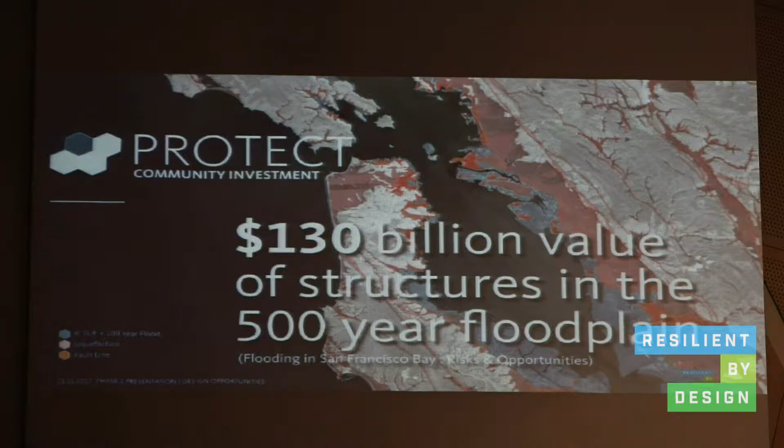So what does it really mean to design a lasting future for the Bay Area? We already know there's $130 billion of value of structures in the floodplain - how do we protect for that? There's 30% growth happening between 2010 and 2040 in the Bay Area, so how do we think about the growth aspect?

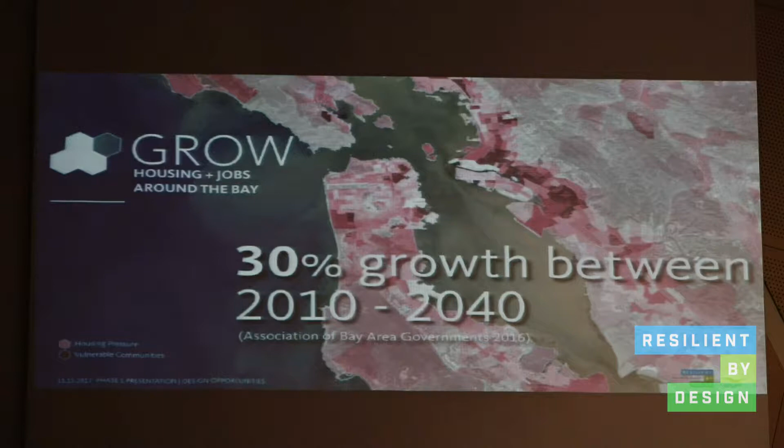When we think about trans-Bay corridors, studies suggest there's 152% capacity needed by 2040, so how do we think about moving goods and people? And there's really only 20% of the Bay shoreline that's accessible, so how do we engage that? Each of these systems doesn't run independently, and when we think about resilience, we want to make sure we think about all these four things together.

Given the complexity and the gravity of this challenge, our team approached the research phase eager to listen and to learn from the regional experts, the resilience experts, and the community leaders to find out what they had to teach us about resilience.

Looking back at the last 10 weeks or so of our process, it wasn't surprising to realize that our most vital insights came from walking through neighborhoods and talking with community leaders, really being led by those who have dedicated their lives and their careers to protecting communities in the Bay Area.

Besides our external outreach effort, our team also leaned heavily on our subject matter experts to conduct qualitative and quantitative research, and to synthesize a wealth of information into our design workshops conducted internally as a team. Together, it was our external outreach and internal workshops that gave us the insights we built on for the design concepts that Ricky and Cecil will be talking about in a few minutes.

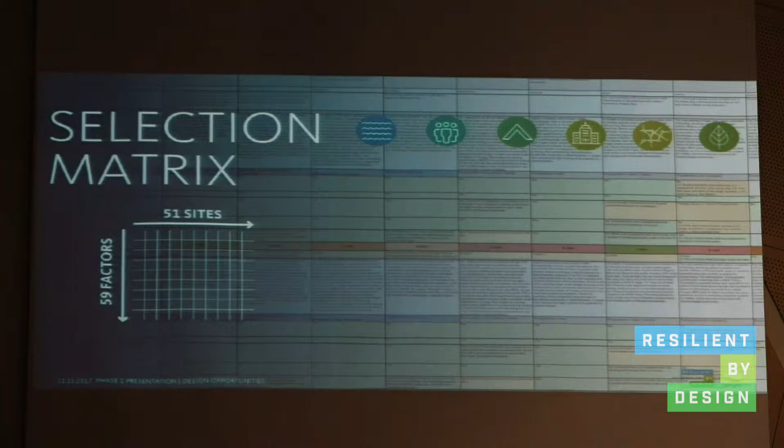With these 6 key stressor categories identified, and looking at these across our 4 strategic goals, our team developed a selection matrix that had over 50 factors and over 51 sites. This matrix provided a tool to allow us to evaluate sites in a more objective way.

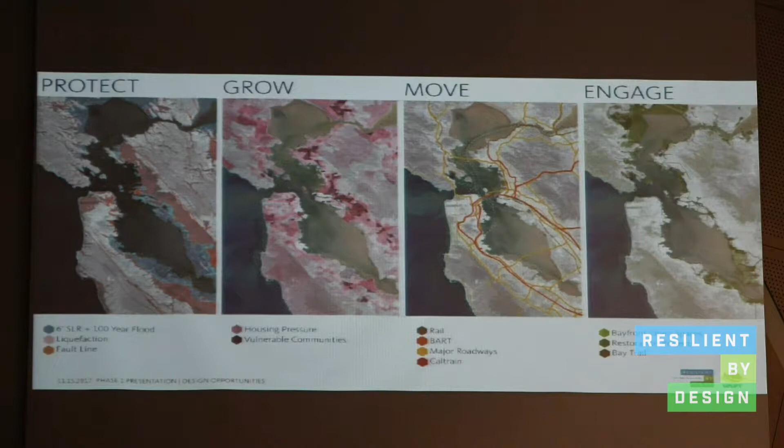Looking at all of the sites and all of the factors we took into account, from flooding to housing to mobility to ecology, we came back to 2 sites in particular, West Oakland and East Palo Alto, that really spoke to our team and presented the greatest opportunities for us to have high-level regional impacts from very localized interventions. From this research, we were able to tentatively identify our intervention area and begin designing the concepts that Ricky and Cecil will be walking through.

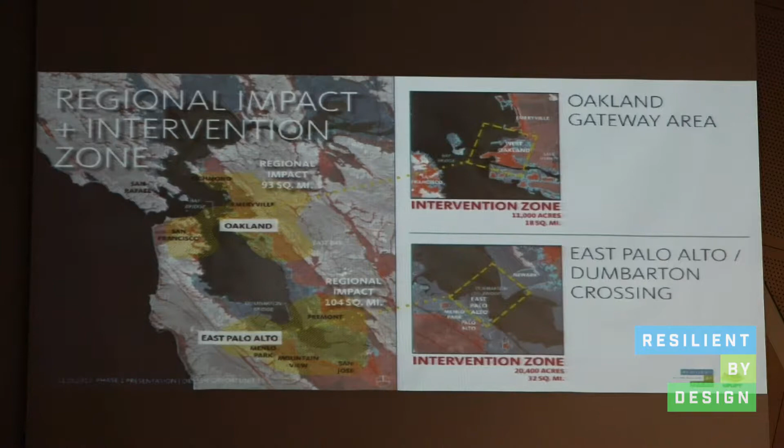So the first site we're going to be talking about is the Oakland Gateway area. What's really interesting about this area is it's very rich in many ways, and all this infrastructure—it's a real 3-dimensional equation and solution where there's so many different factors that come together. One of the most important things is that Oakland already has this vibrant character, its color, its richness. Making sure we understand what that is and work with that as a basic framework is really important.

But with that, how do we create new experiences on top of that? And how do we connect these experiences together? And how do we work with the community to really figure that out?

When we're balancing opportunities here, it's really about thinking about environmental justice, gentrification, and displacement in many cases. Can we actually build something adjacent to, for example, West Oakland, to increase opportunity but also create something that benefits the community adjacent to it as well? Is there a way to manage displacement with that? And is there a way of thinking about the risk of sea level rise and flooding in so many different ways and typologies?

In terms of the constraints, sea level rise—we need to figure out what we do. There's actually 2 vulnerabilities in that area. What do we do with the East Bay MUD and the wastewater treatment plant? And how do we think about some of the investments that are in the liquefaction zones?

We're thinking about growing the community because of growth. If we think about displacement, affordability of housing, gentrification—what do we do with that? Are there ways of preparing for this 30% rise in jobs and housing needs?

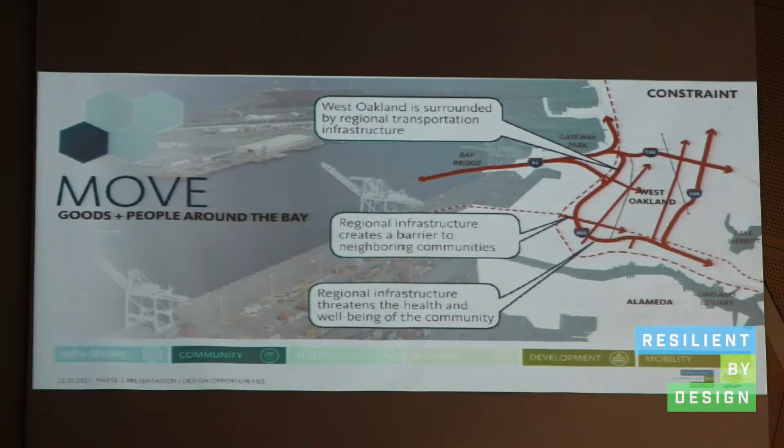In terms of moving, infrastructure is a huge thing. Infrastructure could connect, but in many cases it does divide. So how do you actually create infrastructure that begins to provide value for its adjacencies? And with mobility and infrastructure, are there ways of thinking about it from a health and wellness perspective?

If we want to engage, how do you actually get a community to connect back to the bay? We have an operating port, there's all this rail infrastructure, but how are the ways that we do that? And in many cases, here with Oakland and Alameda, the estuary divides up those communities. So how can we connect those things together?

So the first design opportunity and concept we talk about is bridging communities through uplift. The first thing we do is protect the edges, Gateway Park, and also down on the southern side where the estuary is. In terms of growing, there's opportunities of creating and utilizing the underutilized rail areas to be able to create a deck and a community above that.

There's also opportunities to ease some of that growth pressure as well. In terms of moving, can we actually rethink the I-880 corridor and see what we can do with that? Can we also reorganize some of the port logistics? Remember, all the pollution, the air pollution, all of those things are coming from there, but how do we actually mitigate some of that so there are advantages for the community?

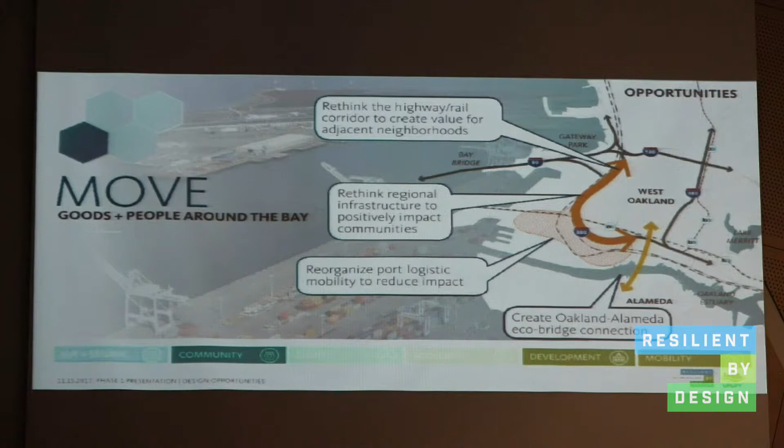And then is there a way to create this kind of eco-connection between Alameda and Oakland? In terms of engaging, if we create this new deck above the railway, is there a way of creating this new connection, bringing green and water closer to West Oakland, but also being able to get closer to the water from West Oakland as well? And then is there a way of creating that connection to Oakland? So the strategies here are a synthesis in terms of our concepts of what we're thinking of doing.

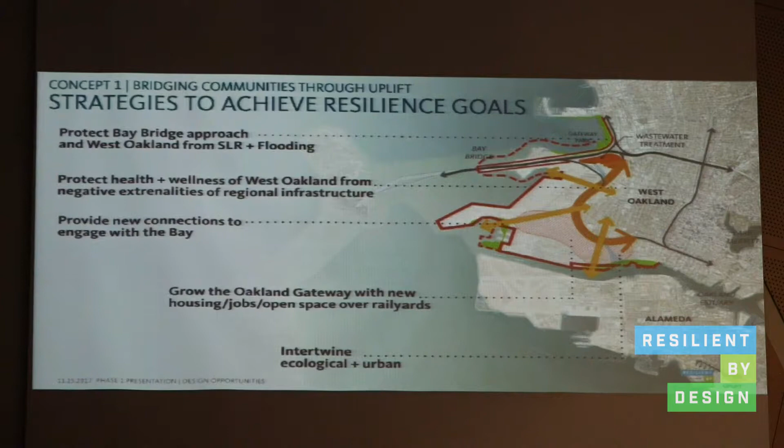It's really about thinking how do we intertwine the ecological and urban conditions, so it's not isolated, but how do we use that to our advantage. We do that in order to protect, grow, engage, and move people.

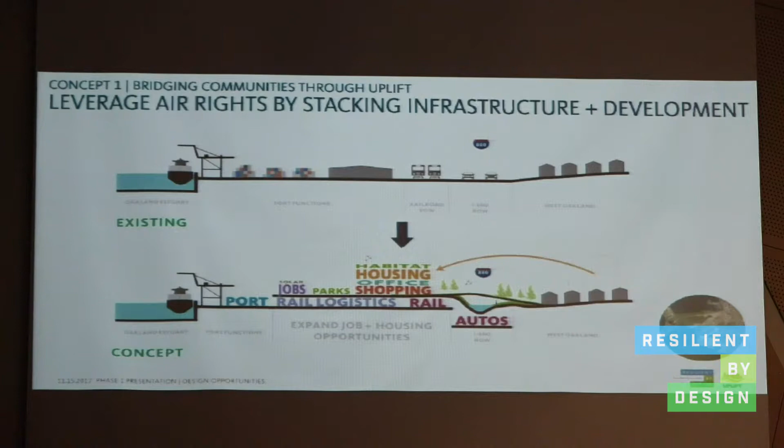So this is thinking about things three-dimensionally. You see the existing condition at the top, and a section at the bottom. The section shows how you can have a dialogue between West Oakland and this new community in terms of new opportunities for managed development. You can see the rail logistics below, and new opportunities for habitat, job growth, and new parks as well.

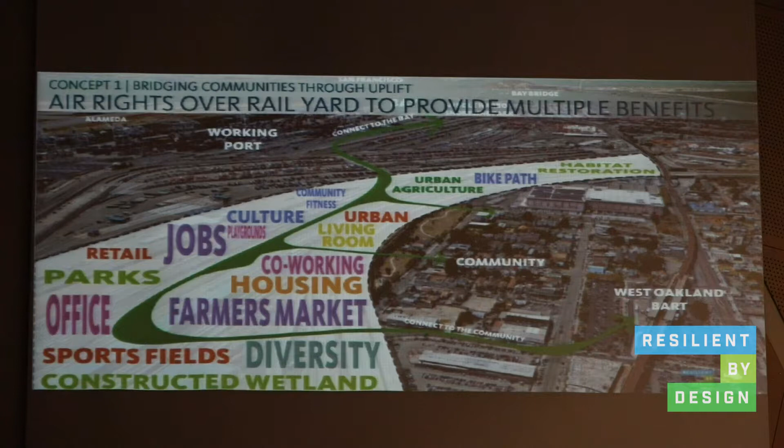We found the challenges and opportunities in this area so compelling and complex that we developed another concept for it, using some of the moves shown in our previous concept but shifting our focus towards bringing water in and using it to connect communities from Gateway Park to Alameda. Our concept reimagines the regional infrastructure, which has disproportionately negatively impacted West Oakland, in particular the wastewater treatment plant, which will become increasingly vulnerable with sea level rise, more severe rain events, and increasing populations.

While sea level rise protection will happen primarily along the shoreline with both hard and soft protective infrastructure, we saw an opportunity to use the 880 right-of-way to address current and impending issues by transforming the spaces under and adjacent to the highway with a green, spongy corridor. We can treat wastewater with wetlands, provide habitat and open space, provide a green buffer for highway air pollution, provide land that acts as a sponge during flooding events, and create a new and protected bay trail.

The corridor would link Gateway Park through West Oakland and down to Alameda, where we're proposing a new bridge to connect West Alameda to Oakland, providing a critical missing link. The right-of-way actually closely aligns with the historic shoreline, and by transforming this land, we're reconnecting two parts of the bay that were historically tied together.

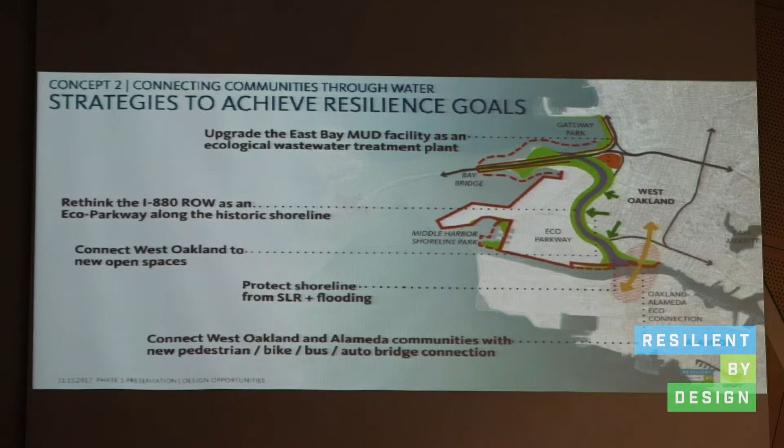In an area so cut off from the bay, we think it's critical to provide more ways and spaces of engaging with the bay, and to use water as cultural placemaking, understanding that resiliency is not just about flood protection but also about creating social cohesion. This likens to cities with canal networks—the canals were often built to control for flooding, but over time have become iconic elements of the city, and we see that creating a sense of place strengthens community.

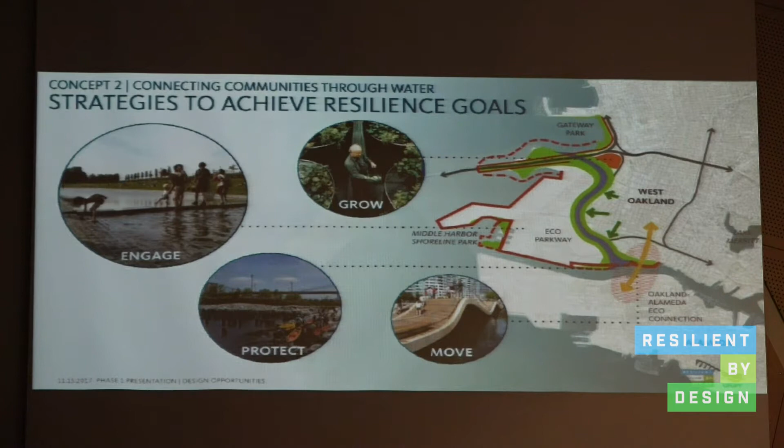At the southern end of our site, the Oakland estuary currently forms a barrier between Oakland and Alameda. By bridging the estuary, we can connect communities, activate both sides of the estuary, and provide more access to the water and an evacuation route during disasters. By reconfiguring the existing transportation arteries, including undergrounding the rail, we can create space for development, improve air quality, and reduce neighborhood traffic.

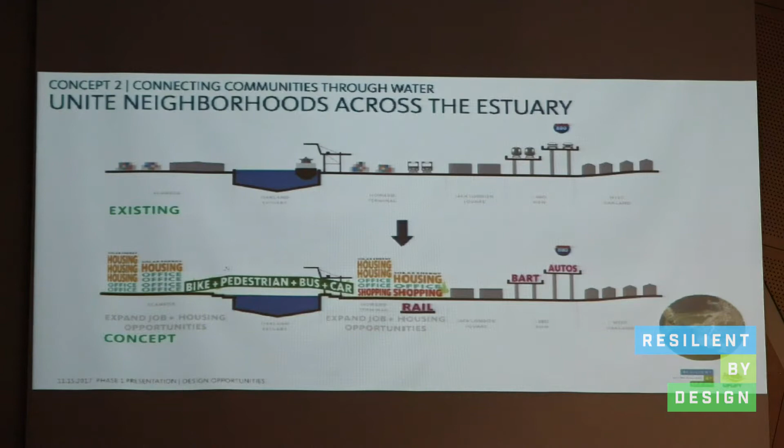Further north towards the Bay Bridge, the existing conditions show the breadth of land devoted to the rail and 880 corridor. Our concept transforms this land into a blue-green corridor, and while we likely won't be able to absorb all 63 million gallons of water currently treated by the wastewater plant daily, a series of constructed wetlands within the corridor could treat some of that wastewater, allowing for infiltration and improved water quality discharge to the bay.

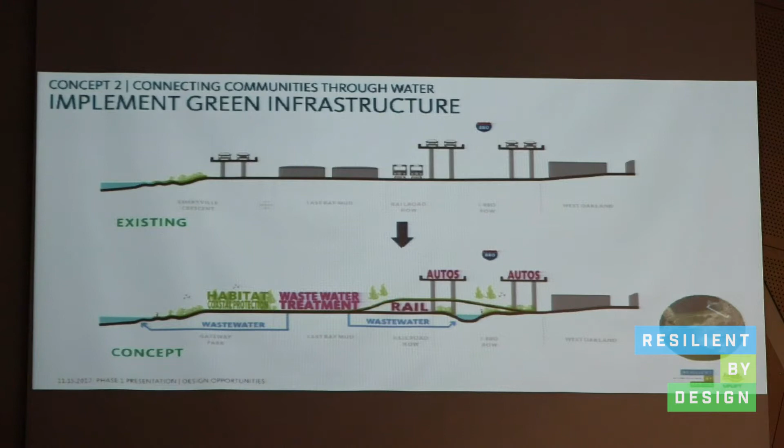We also see that those wetlands could act as habitat, providing a missing link between the Emeryville Crescent Marsh and down to the Oakland Estuary and San Leandro Marsh. Adjacent uses could include recreation areas and other floodable programs so that during storm events, there's more land to absorb water.

The anchor of our blue-green corridor is the bridge to Alameda, which will integrate mixed-use development so that people can work where they live, enhance the park system and transportation network through dedicated bus lanes, bike lanes, and open space, reduce traffic and commute times by providing a more direct route to the East Bay, and most importantly, connect two communities, creating a stronger, more resilient Oakland and Alameda.

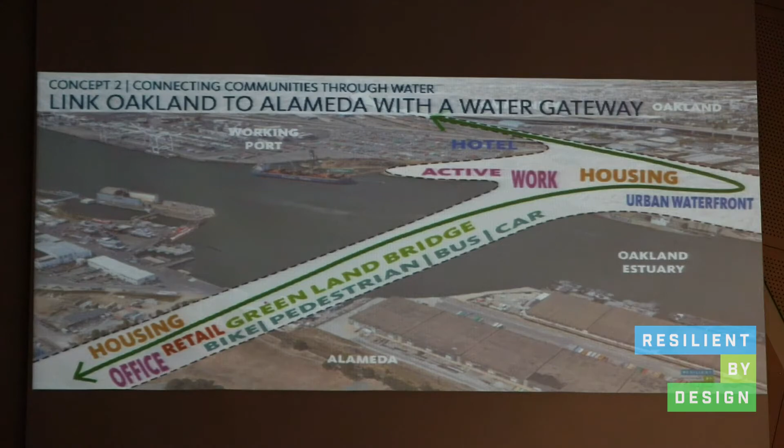So the third site we're going to be talking about is the East Palo Alto and Dumbarton Bridge crossing area. I just want to preface this right now: there are really some complicated regulatory aspects down there. In terms of growth, we need to think about how cities will evolve in the future, so we're looking more long-term, at the 2050 timeframe.

East Palo Alto has amazing character and richness, so how do we keep that as a foundation while introducing new experiences? It's about how you actually build on the bay and still maintain some of that ecological aspect. How do you do an intervention that may not have much impact on the bay itself, but will improve other aspects? We need to protect some of the edges.

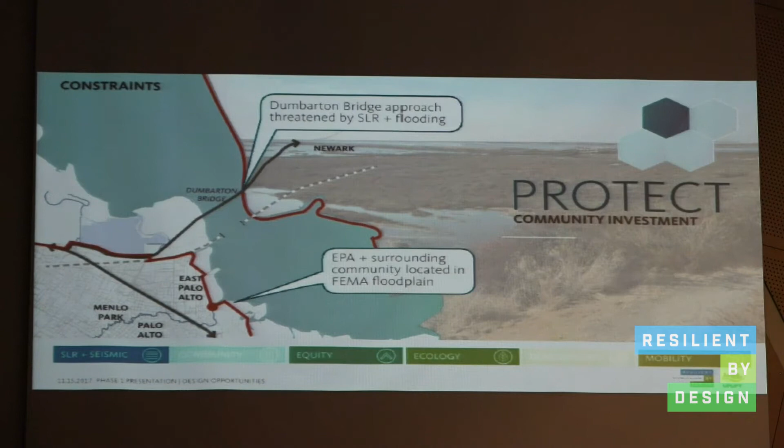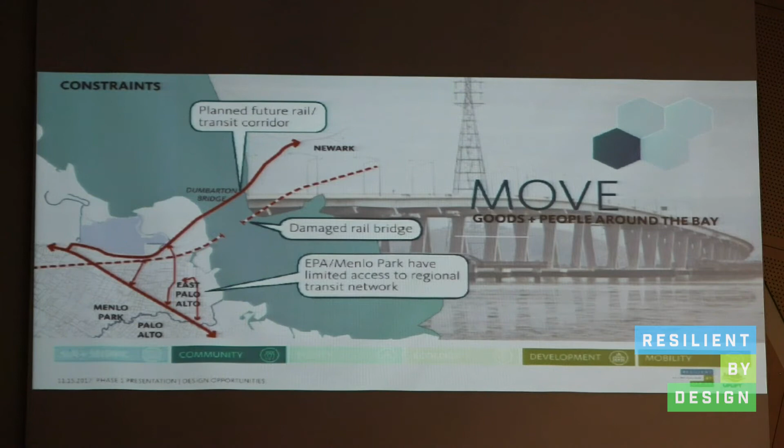Thinking about growth, there are three communities there: East Palo Alto and Menlo Park. Think about affordability. How do we move the Dumbarton Bridge itself and the damaged rail corridor? How do we begin to connect those things together, and how do we think about engaging with the water so that the water actually becomes a destination as well? So the third one we call habitat opportunities, above and below.

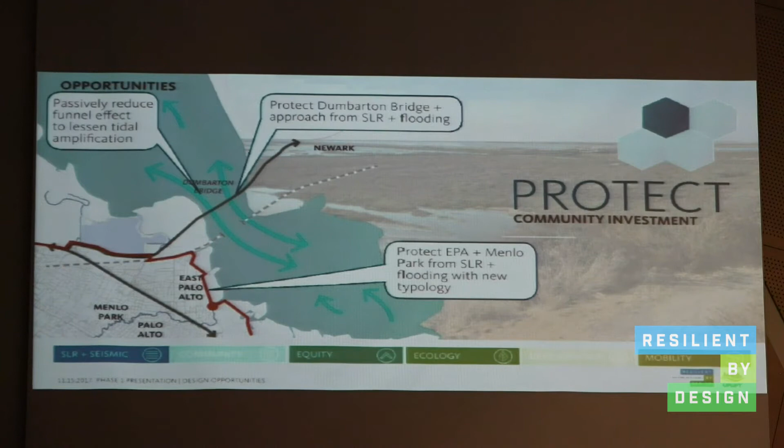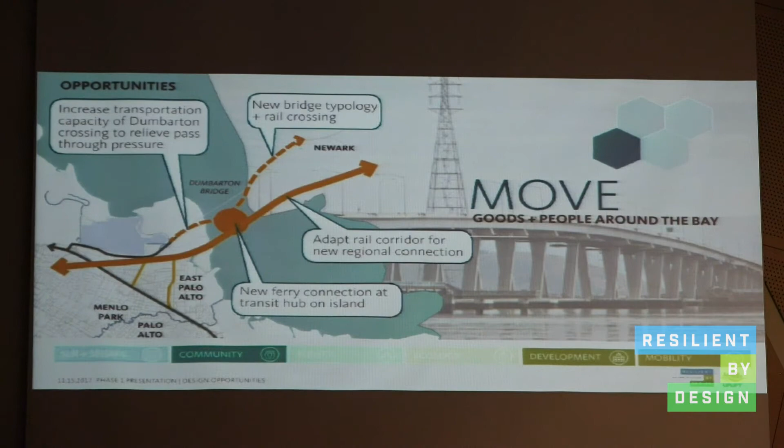We're protecting the edges of EPA from sea level rise and flooding with a new typology. Is there a way to improve jobs and housing by thinking about the opportunity by the water, thinking about transportation in terms of new ferry connections, and a multifaceted bridge system that begins to tie together all these different modes of transportation.

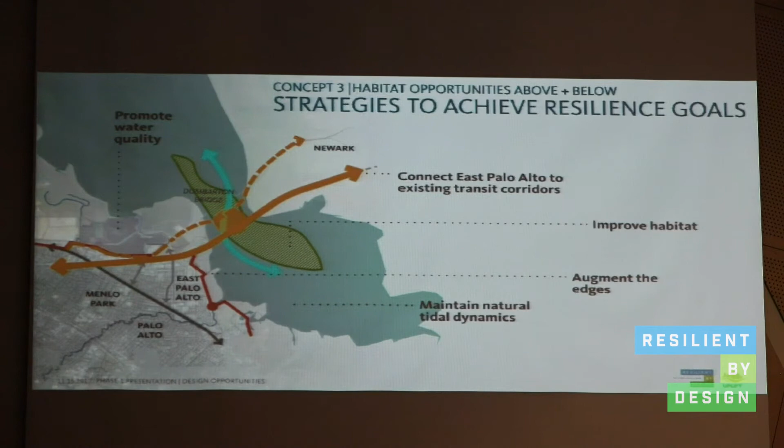And then how do we engage — it's really this opportunity zone — is there a way of creating this habitable intervention on the bay? So these are some of the strategies we're thinking about that need to all come together, in terms of being able to move, protect, engage, and grow this area.

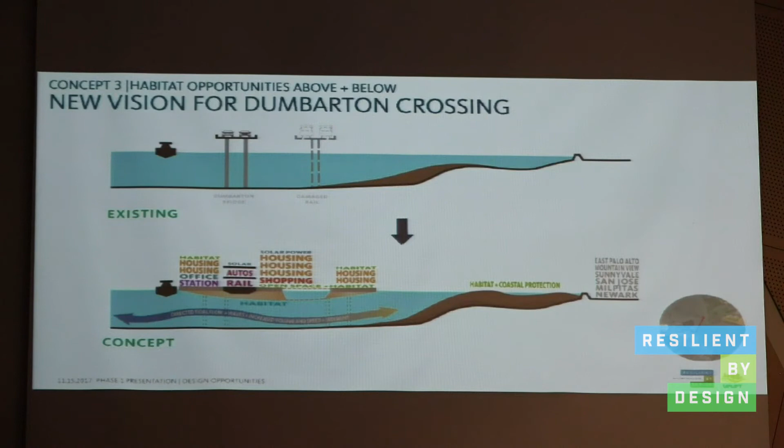Here's a section basically showing that kind of intervention that is actually on the bay. We're thinking about how you get back to some of the natural tidal flows, but is there something we can actually create that really thinks about managed displacement and other opportunities for habitat and housing? We call this one the bay as home and its destination, as opposed to the bay just being a thoroughfare.

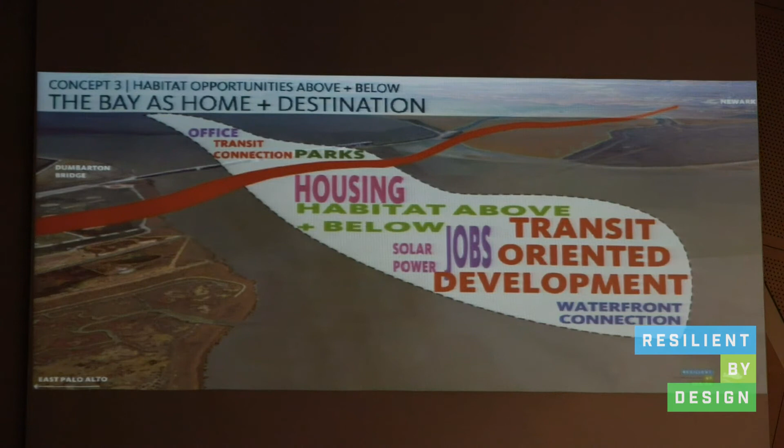As you heard earlier from Ricky, the economic lens played a very important role, not just in identifying the sites and interventions in terms of where they will go, choosing the areas where they'll have the greatest impact, and communities around them which have been the most stressed in the Bay Area. It also plays a really important role in our thinking around the types of interventions that will have the greatest long-lasting impacts. I think all of these interventions unlock tremendous economic value for the region, as well as for the communities around them.

I think the test of these strategies will be how we can capture that value and deploy it in a manner that doesn't just flow back to the infrastructure itself, but has long-lasting impacts in the community. That's going to be a critical piece of our thinking as we develop these solutions, so that these impacts stay in the community and the communities have the greatest benefit.

West Oakland and East Palo Alto are caught between two surges: rising sea level and rising housing prices. Community members legitimately fear that design solutions that help them become more resilient to climate change will exacerbate gentrification and squeeze them out. We recognize that listening is going to be even more important in this next phase of the challenge.